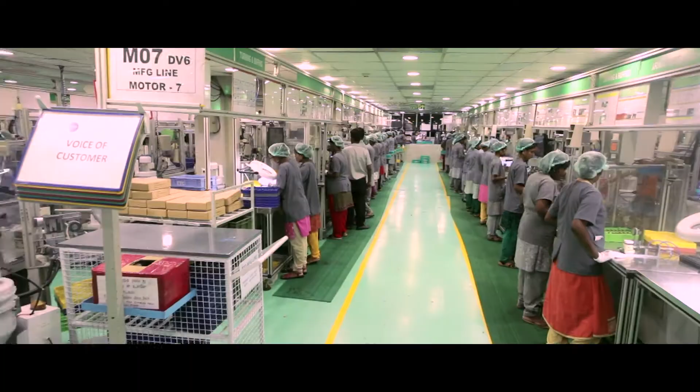Igarashi Motors, IMIL, is primarily engaged in the production and export of permanent magnet DC motors for the automotive sector, specifically for passenger cars. IMIL's key product application is electronic throttle control, ETC.

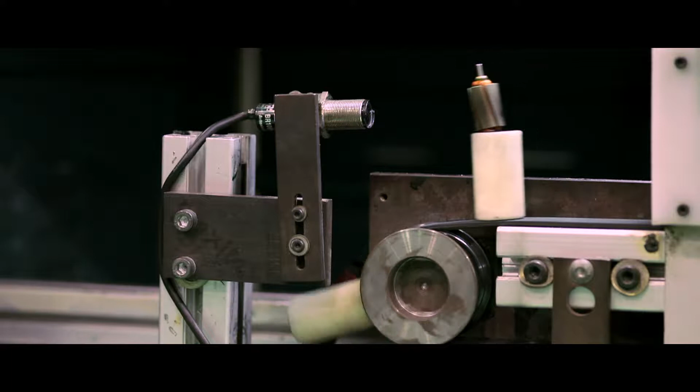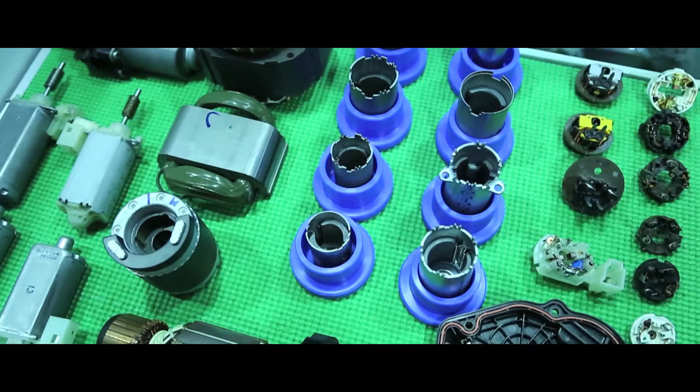IMIL is a leading global automotive component market player in actuator motors, a variety of DC motors. Since 1996, IMIL in the global automotive component industry has populated over 500 million DC motors for usage in actuator applications and systems in passenger cars.

IMIL has two units in MEPZ SEZ Chennai. Unit 1 is situated in plot number B12 to B15, Phase 2, and Unit 2 is situated in plot number A8 to 10.

Certification: ISO 14001 in 2015, TS 16949 in 2009. We are the largest manufacturer of DC motors in India by volume.

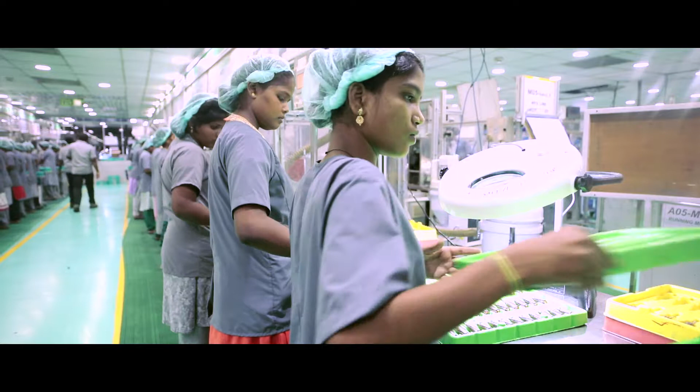IMIL is into the manufacturing of armature subassembly, brush card subassembly, stator assemblies and motors with accessories.

Some of our key customers in alphabetical order: Bosch, Borgwarner, Cooper, Conti, Delphi, Dell'Orto, Magneti Marelli, Mikuni, Pierberg, Visteon, Valeo. Key highlights: Igarashi India specializes in the manufacturing and export of DC motors and motor subassemblies to the global automotive industry.

Igarashi India has carved out a global market share of 35% in electronic throttle control ETC motors, which is part of the torque actuator motor, TAM, family and a niche application of auto DC motors.

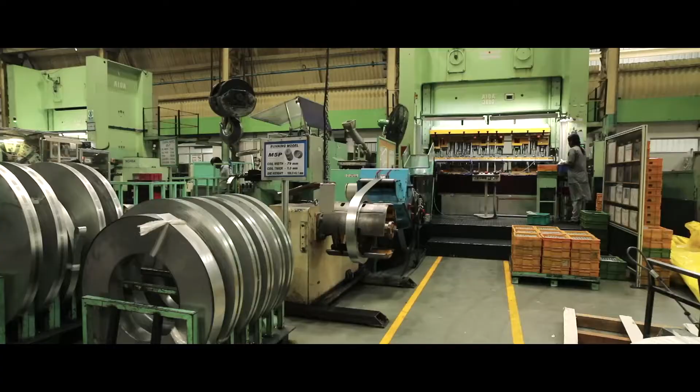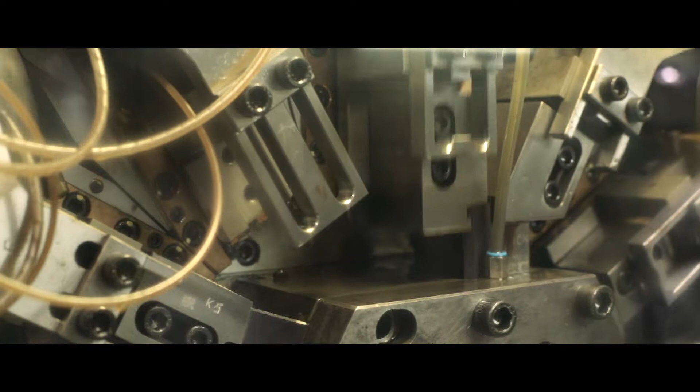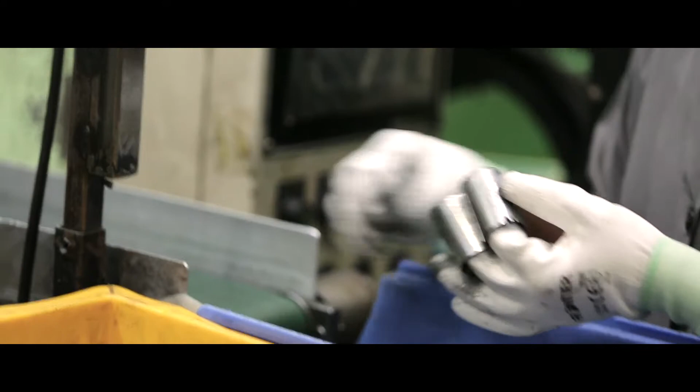Igarashi's key strength has been making high quality motors at the lowest manufacturing cost compared to global peers. It is the lowest cost producer of chosen motors with a vertically integrated manufacturing model and global economies of scale, with global quality levels of less than 3 ppm rejection levels.

Igarashi R&D facility. Research and development is an important means for achieving future growth and maintaining a relevant product in the market. Companies often spend resources on investigative undertakings in an effort to make innovations that can help develop new products or processes, or enhance pre-existing products and manufacturing processes.

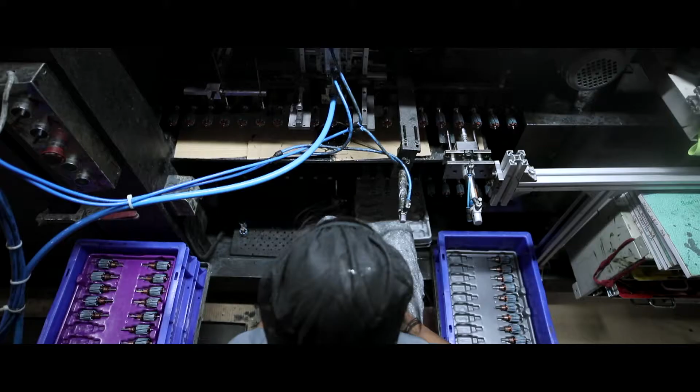These activities come under the research and development umbrella. A dedicated team works day and night to prove that the design intent is meeting the end customer requirement. The capacity range is from 1000 to 1500 kilogram force, which can develop a maximum acceleration range of 90 G.

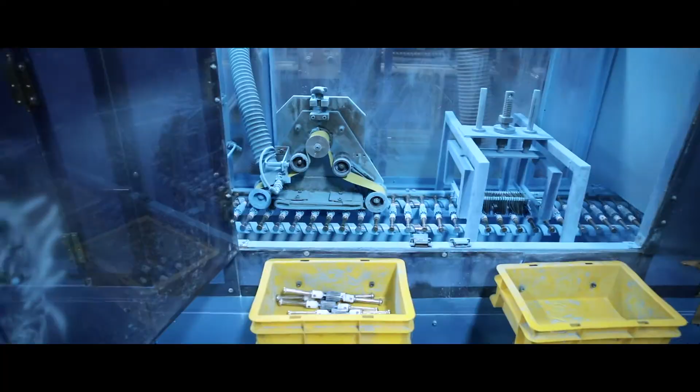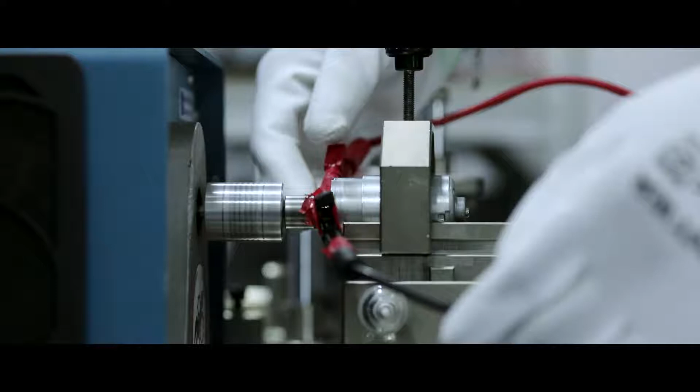Igarashi Motors in India, one of the pioneers in manufacturing small motors for engine air management systems in the country, has ventured into creating an exclusive R&D facility in its Indian operation. The result is a dedicated research center called Tech Wing, which is formed to cater to the increasing demand of the global automotive and consumer needs.

A pool of 50 engineers are continuously engaged in this facility to work on innovative solutions to substantiate market needs, featuring high performance, small size and less weight. The management of Igarashi India took a rational decision, keeping in mind the future needs of the ever-growing motor industry.

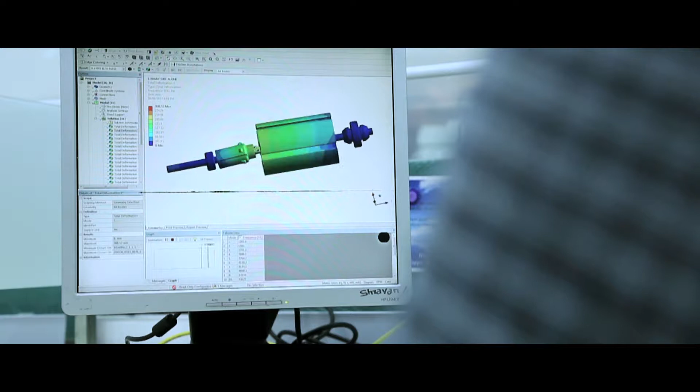Research and development process. The R&D may take months or years to yield fruitful results. Manufacturers of a variety of products utilize this process for new product development and innovation. Though each company or industry may have its own unique research methodology, a basic research process will use the framework below.

Generate, focus, develop, prototypes, validate, release, generate ideas.

At this point, the research team may sit down to brainstorm. The discussion may start with an understanding and itemization of the issues faced in their particular industry, and then narrowed down to important or core areas of opportunity or concern.

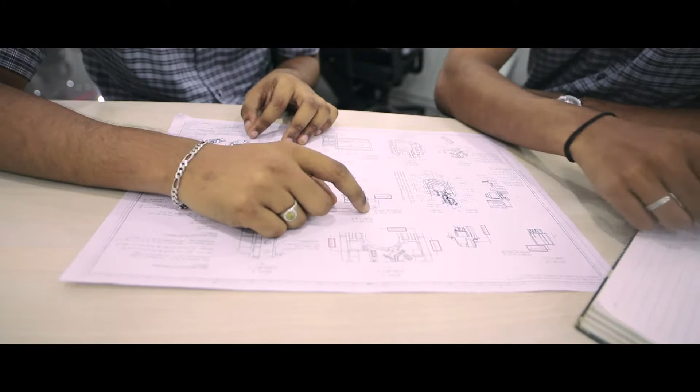Focus ideas. The initial pool of ideas is vast and may be generic. The team will then scrutinize and locate ideas with potential, or those that do not have insurmountable limitations.

At this point, the team may look into existing products and assess how original a new idea is and how well it can be developed.

Develop ideas. Once an idea has been thoroughly researched, it may be combined with the market survey to assess market readiness. Ideas with true potential are once again narrowed down, and the process of turning research into a marketable commodity begins. To target the feasible ideas and reject ones that are far-fetched right at the initial phase itself, Igarashi is facilitated with advanced tools.

The electrical design team is equipped with softwares, FEMM, Speed, and Magnet, that simulate the motor behavior, and the electromagnetic fields can be analyzed.

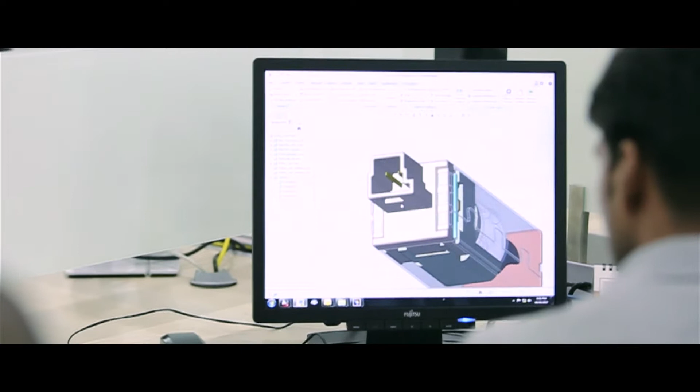The concept design is done using computer-aided designing and engineering softwares, CATIA, Creo, SolidWorks, and AutoCAD is used for detailing. The mechanical design team works with FEA, ANSYS, and SolidWorks simulations to understand and better the structural and thermal behaviors of the motor.

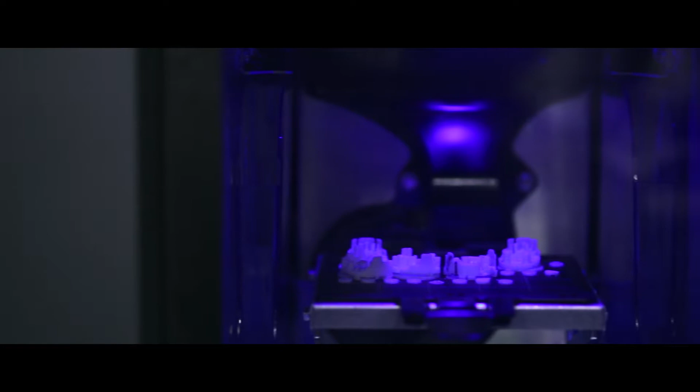To bring down the prototype time, we are equipped with an advanced printer that can print the model in 3D, which helps to view the part or assembly before actual tooling and manufacturing. This saves the tooling cost and gives more perspective.

Tools like DFMEA and DFSS are used to predict design failures at the concept stage itself. All designs are based on the DFM concept.

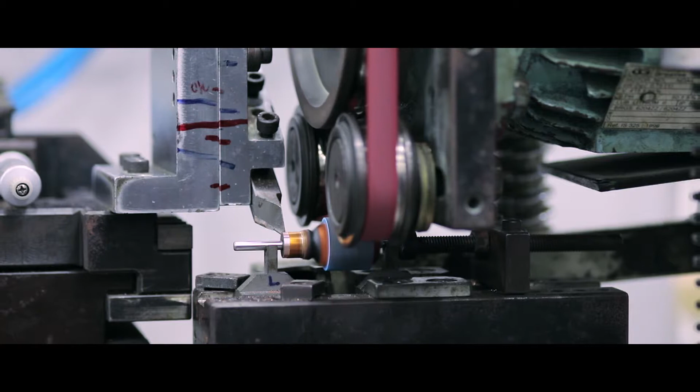Prototypes and trials. Researchers may work closely with product developers to understand and agree on how an idea may be turned into a practical product. As the process iterates, the prototype complexity may start to demand special processes to achieve the design intent.

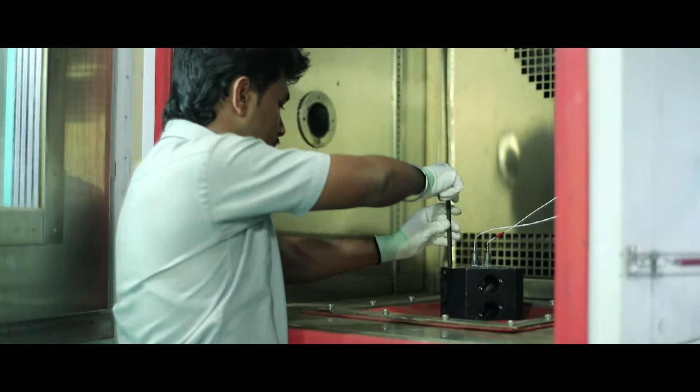Validation. As the product takes shape that began with R&D, there comes the validation part, which is a very important milestone in research activity. Igarashi India has a dedicated product validation facility with high precision system to verify the product as per the design and customer specification.

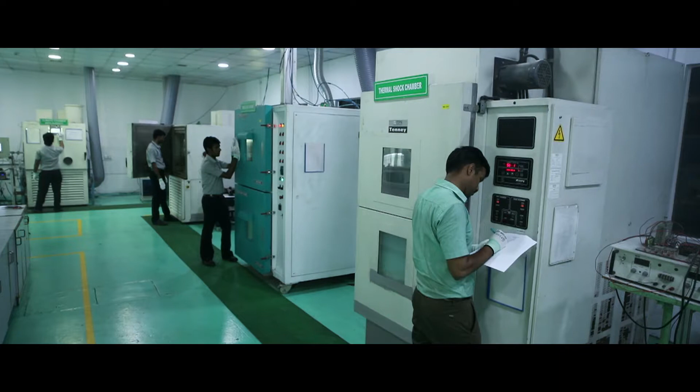Let the issues be performance related, environment related, or the critical vibration related, Igarashi India has state-of-the-art devices and equipment.

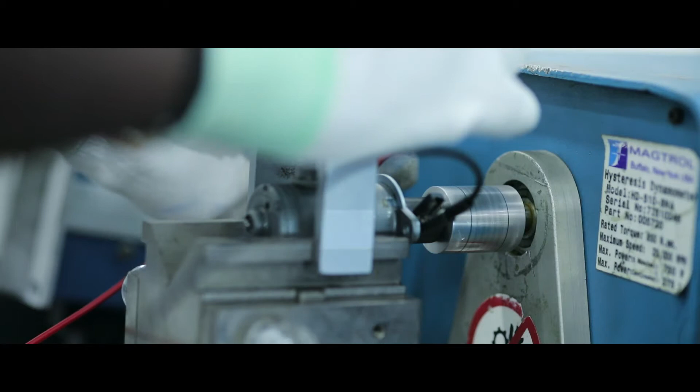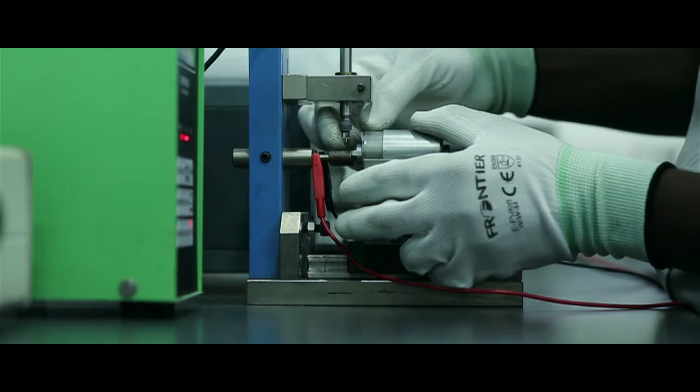In general, testing small motors is a cumbersome process, but the Magtrol dynamometer test equipment makes life easier with its precise measuring capabilities. This device has the capability of measuring the motor performance to 1 millinewton meter accuracy, fully controlled by M-TEST 7 software for brushed motors, and a dedicated test rig kit for BLDC motors.

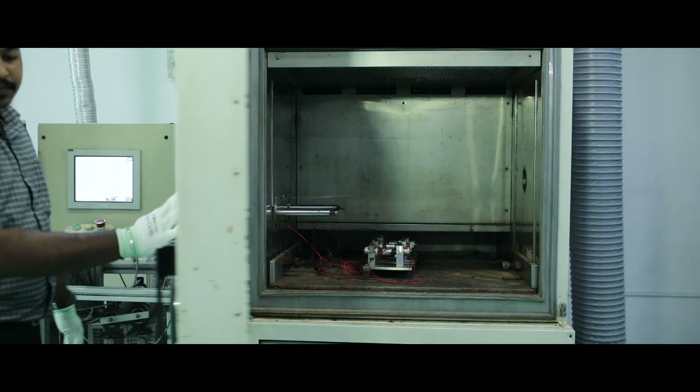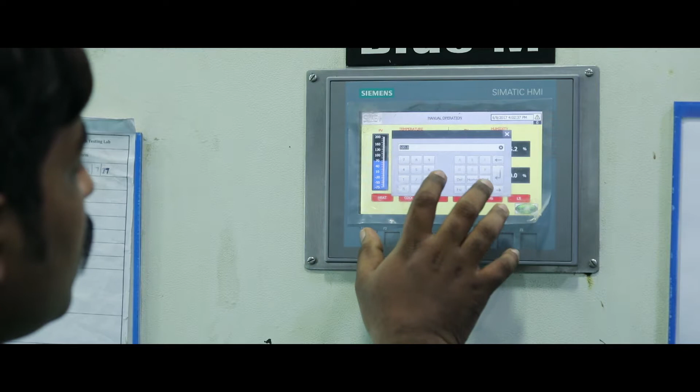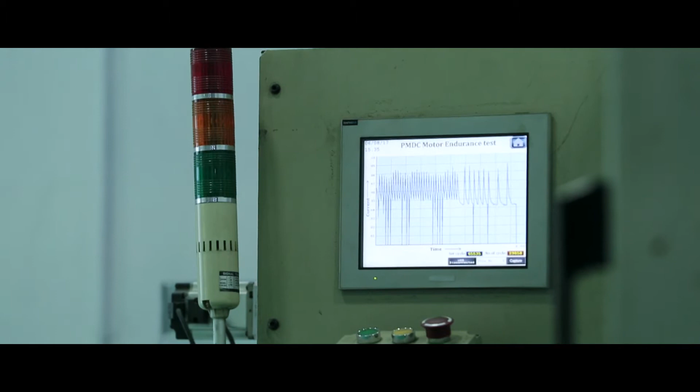For material-related testing, the contribution from the environmental chambers is quite high. This equipment is capable of reaching -70 degrees Celsius to +200 degrees Celsius to validate the structural capabilities of the critical plastic materials, which is a prerequisite of the application. This ramp-up of temperature from one end to the other can be done in 10 seconds.

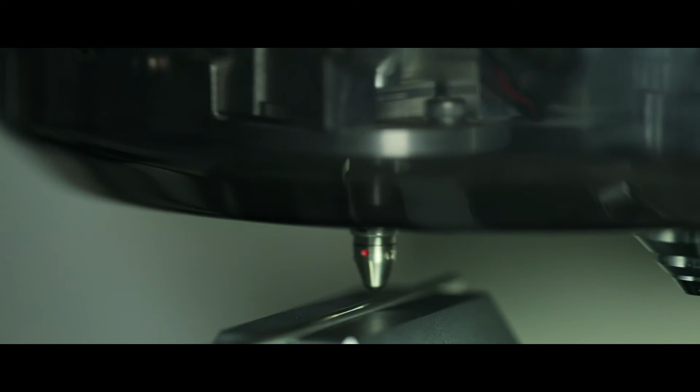Thermal combined vibration test is a significant requirement for engine management systems that has become mandatory to ensure the structural capability of the product. Igarashi India has understood this very well and invested in vibration equipment generously to cater to the market need as well.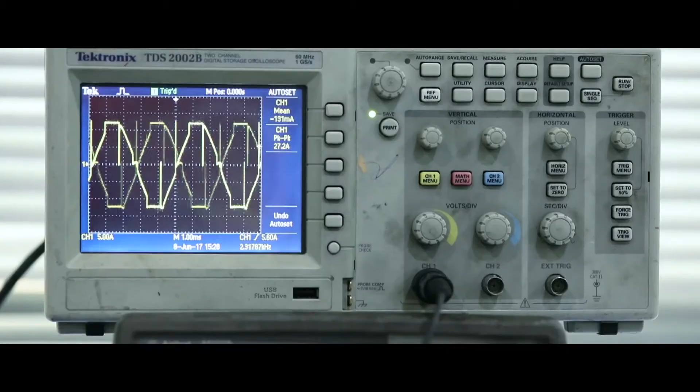These machines are capable of achieving sine, random, and sine-on-random vibration profiles along with combination of environmental chambers with temperature control from -70 degrees Celsius to +200 degrees Celsius, which have become a mandatory and critical requirement of global automotive customers.

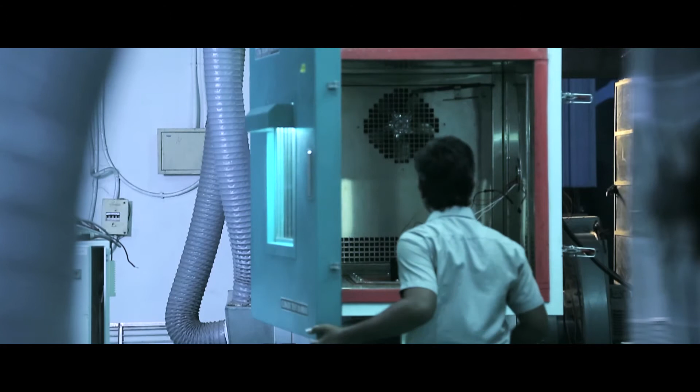Release. The entire R&D process is backed up by a dedicated program management team with necessary project management solutions. A team of 25+ engineers are committed to convert the thought process of each design engineer.

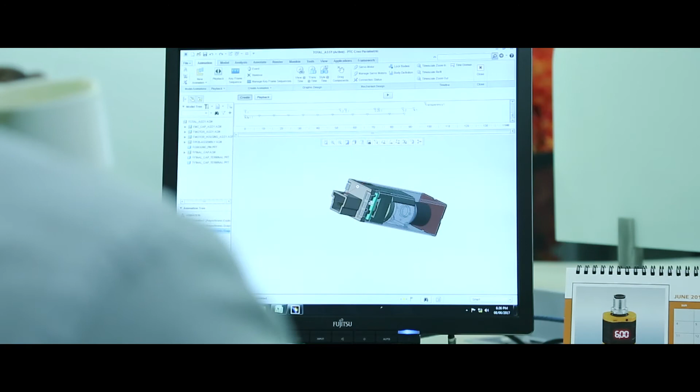Each activity of the R&D process is empowered by strong project organization with functional excellence, keeping cost, time, and resource management as KPIs. The entire activity is performed in line with organizational objectives by applying standard processes and techniques.

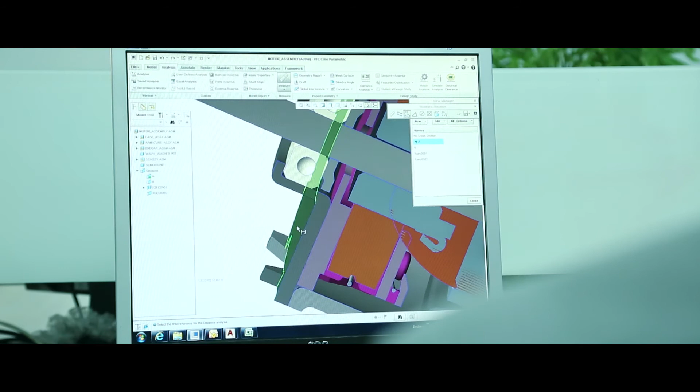In order to realize the R&D activity successfully, the program management team is an important interface to organize the necessary contributions from purchasing, supplier quality, and process engineering on time.